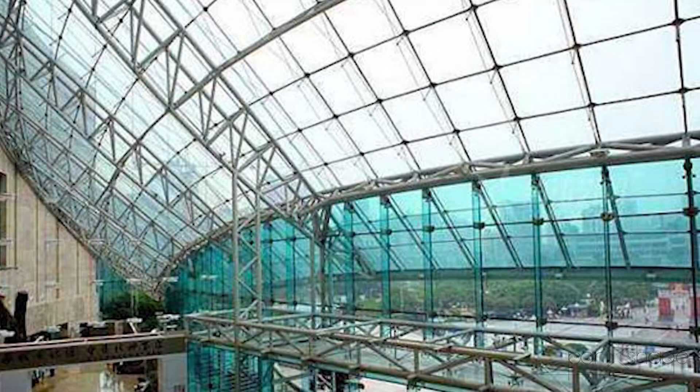In a world where beautiful glass buildings exist, where techniques of implementing this material are constantly being improved and new methods of application are being developed, glass is being used more and more in all kinds of structures in order to make full usage of its transparency and aesthetics. But beauty has a price, and beautiful things should be protected.

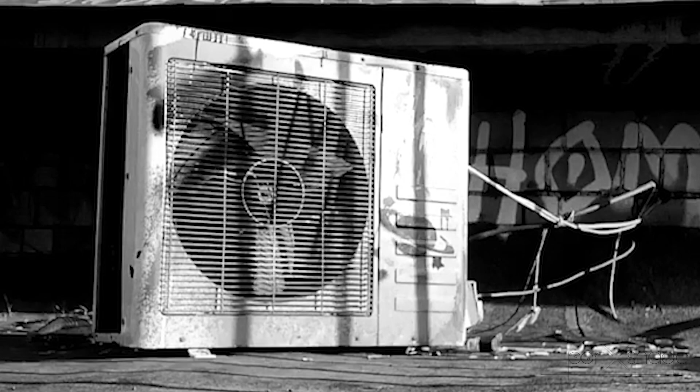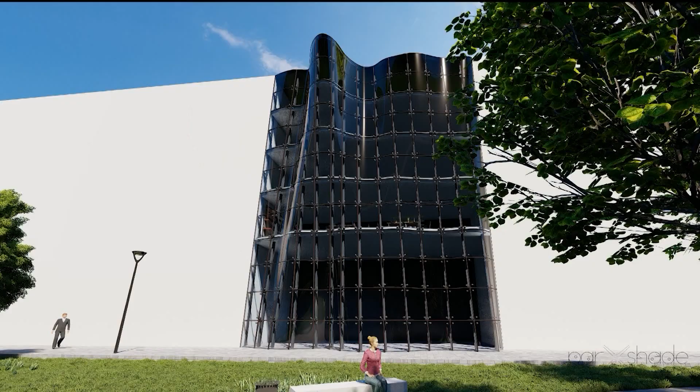We have made Parshade. We have created a system that is invisible, that is aesthetically pleasing, that is quick, and is also adaptive to any shape of glass, but also isolates. We have made Parshade. But how does this work?

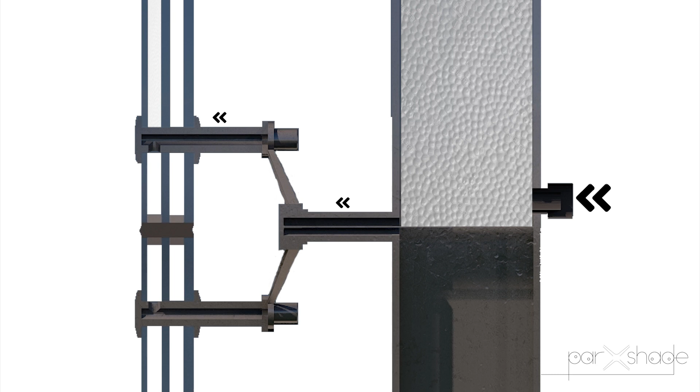Parshade has been developed through taking a standard point held glass system with a steel construction behind it. By hollowing out the connections, room is made for particles. Particles would flow to the cavity using compression. With suction, the particles will go back to its storage, that is located inside the building structure.

As you can see, there are no visible parts around the glass. The main part of the system can be centralized in your basement. The vacuum and compressors can be located here. And how does this look in practice? Parshade is an exemplary product for buildings with complex multi-directional bent glass facades, such as the one seen here.

Every glass pane can be filled individually in order to only provide sun shading where it's necessary. For buildings with large glass facades, this can also be used to create interactive patterns which the neighboring street can enjoy.

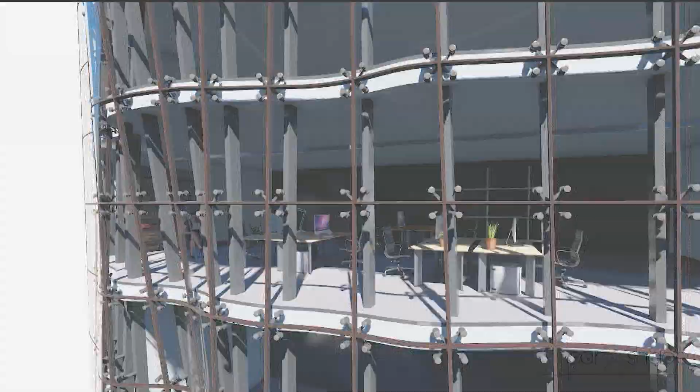From the inside, the system looks like this. A sunshade system that never closes in exactly the same way. A system that is truly something you actually want to close and open over and over, just to have another look at it.

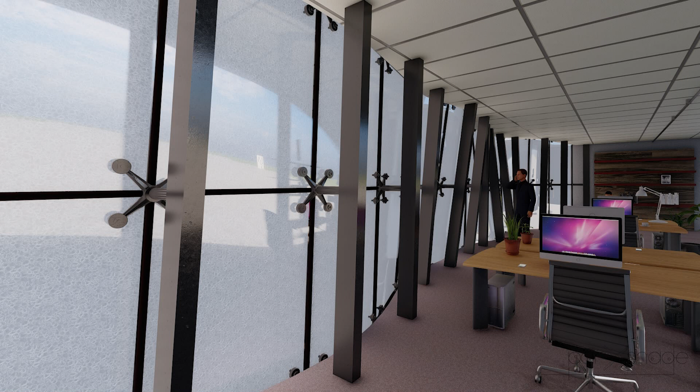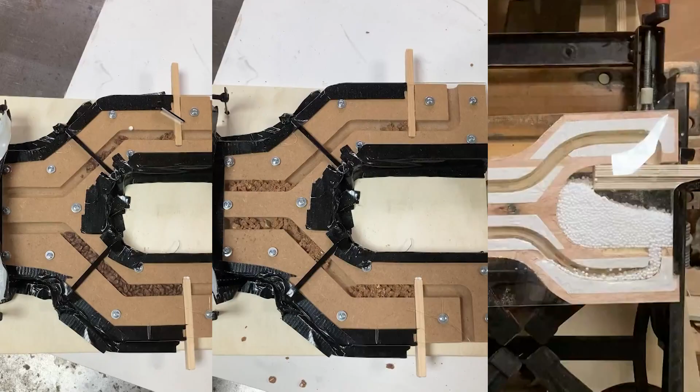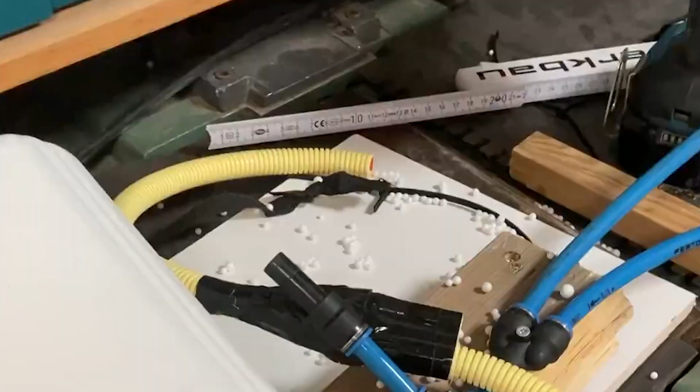And how did we even come up with this? We translated the real case scenario to a wooden prototype that we could make ourselves. We started off with researching possible cavity fillers in order to ensure that there was no outer system required in order to sunshade the complicated shaped glass. We tested different kinds of transport tubes and flow patterns.

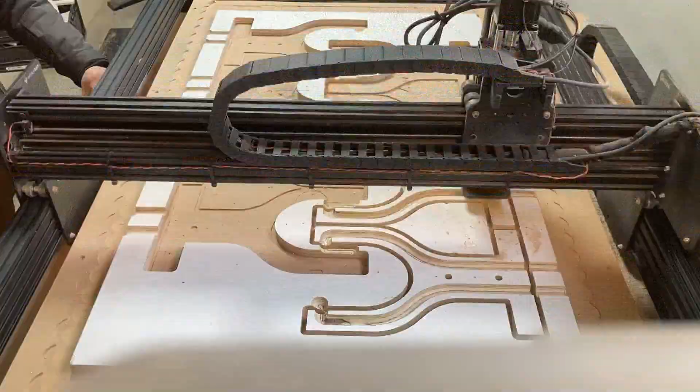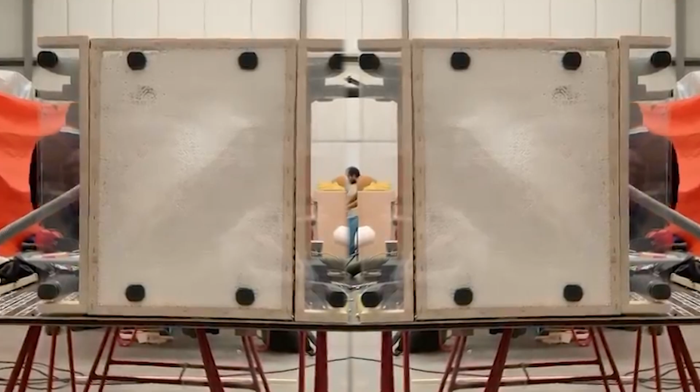With highly accurate machined parts, a connection was made between the storage and the cavity. To show off the capabilities of the system, a 3D shaped glass panel is recreated. With some coating, gluing, and vacuum forming, this was recreated. All there was left to do was assembling. After some successful tests, but also some failures, we got a working prototype.

As you probably would have seen at this point, this product shows some great potential, but we are not there yet. Although the prototype was working, it was not consistent. Air leakages appeared frequently and particles would just blow out all over the floor. The used vacuum did not have enough power to lift the particles up the 40 cm high panel, so we need to think of what we will need to use for a 3 meter high case.

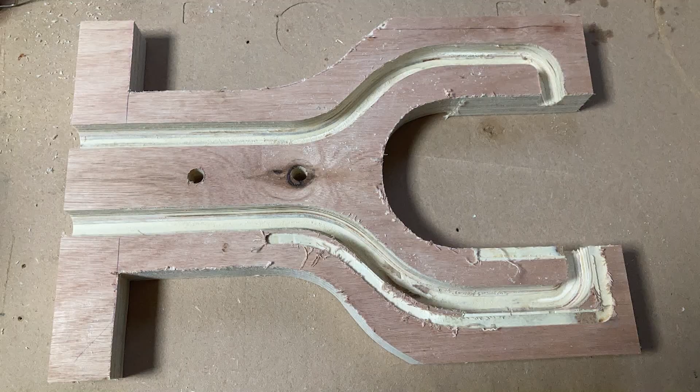We also had to deal with static electricity that would build up in the system and the glass would deform under the vacuum. But we are proud to deliver you Parshade.

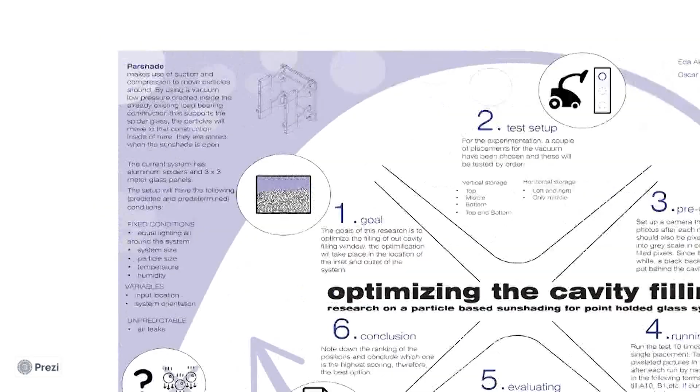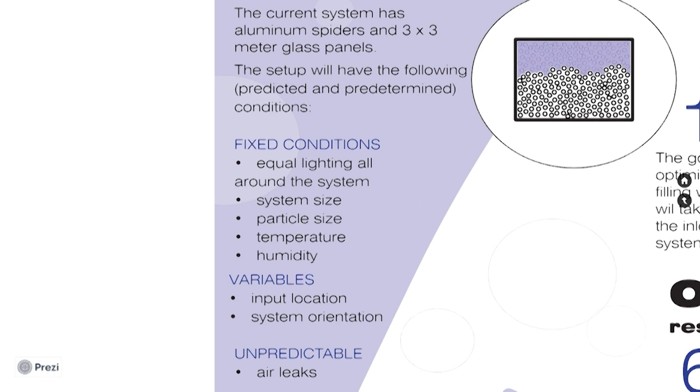During the building weeks, we discovered quite a few problems, as was discussed before. We also discovered that by changing the position of the vacuum inlet and by rotating the reservoirs into a horizontal position, a lot of these problems could potentially be solved. The most important problem we came across is the fact that the cavity of the glass doesn't completely fill, because gravity is preventing some of the particles from being pushed out of the reservoir.

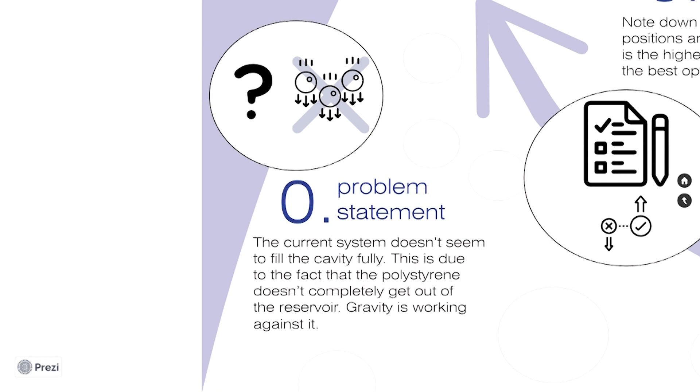The goal is to optimize this filling process to achieve a cavity that is completely filled as shown in the schematic. To achieve this, a test setup is made. Several reservoirs are made, each with different locations of the vacuum inlet. In this subdivision, a distinction is made whether the reservoir is going to be placed vertical or horizontal.

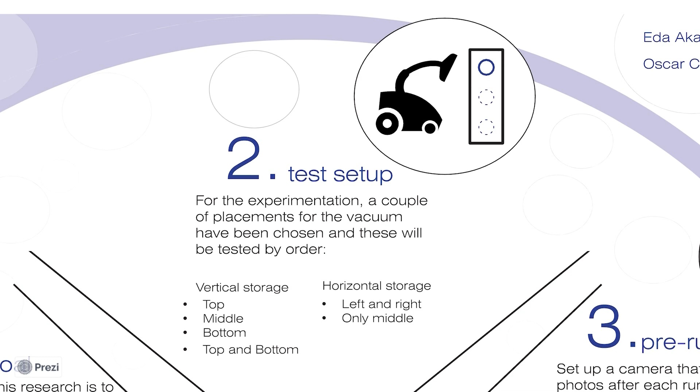As a next step, a camera is set up in front of the prototype. By putting a black screen behind the glass pane, a starker contrast is created between the background and the white particles. For every picture, equal amounts of light will be shining around the prototype. Then, by pixelating every image in the same way and turning them into grayscale, good comparisons can be made.

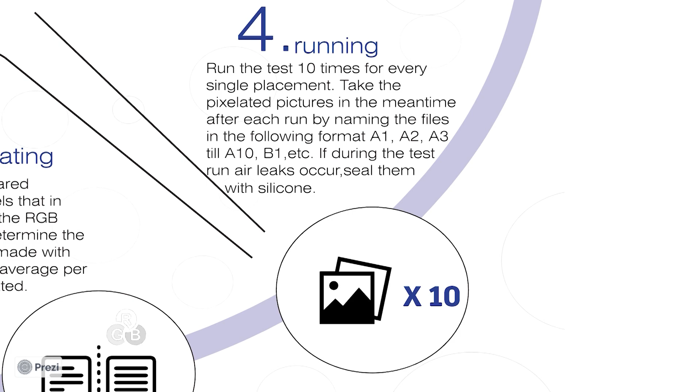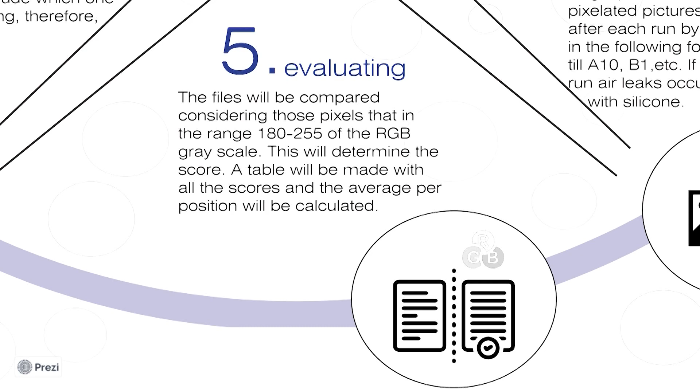After this setup process, it is time to run the tests. Every variant is run 10 times. After each run, a picture is taken, pixelated, turned into grayscale, and appropriately named. These pictures are then evaluated based on how many pixels have a white color, defined as ranging from 180 to 255 on the grayscale range.

With the average value of each test, conclusions can be drawn about the best vacuum inlet position and orientation of the system. The picture with the highest amount of white pixels will show which variant is the most optimized.